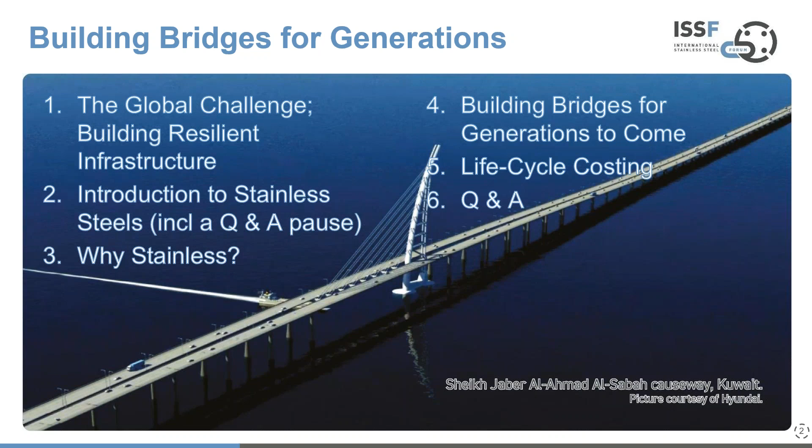Section 3 will talk about why you would choose stainless steels. Then in section 4, we'll showcase some of the current bridges where stainless steels have extensively been used and talk about why stainless steels were chosen. Section 5 will talk about life cycle costing, which is an important component when thinking about material choices, and particularly stainless steels. And then section 6 will have a fuller Q&A session. So the presentation section itself should take about 45 minutes, which gives us some time at the end for a full Q&A session.

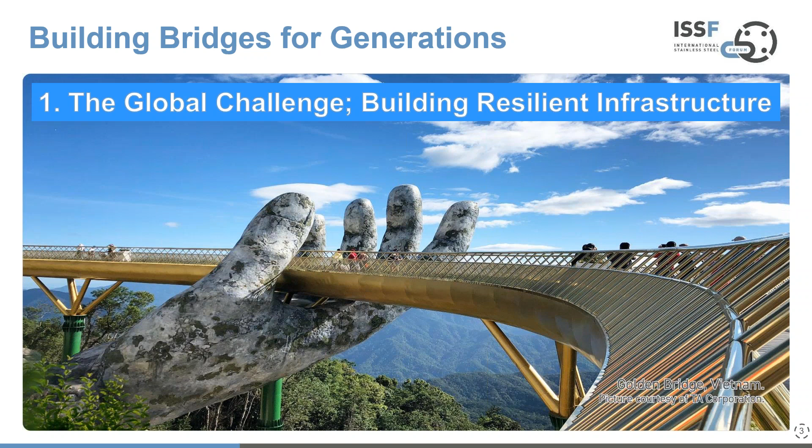So I'd like to move forward now, and we'll talk about the global challenge, which essentially is building resilient infrastructure. But first and foremost, I'd like to travel back in time to the birth of stainless steel. This gentleman, an English gentleman, Harry Brearley, was one of three people who are really credited for the creation or invention of stainless steels. And Harry Brearley is also credited with producing the first commercial cast of stainless steel.

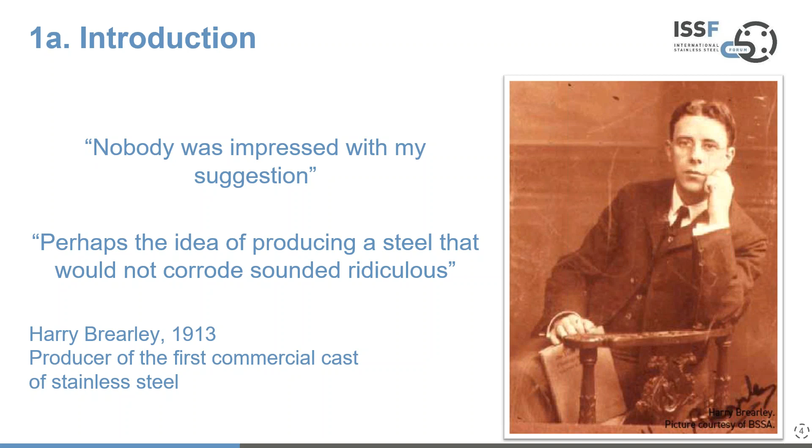And he made a wonderful quote in 1913: "Nobody was impressed with my suggestion. Perhaps the idea of producing a steel that would not corrode sounded ridiculous." And I think there is still some of Harry's words echoing around in today's society. People don't often consider stainless steels first and foremost, and there are many good reasons why people don't consider that. But I'll talk about some of those features a little later, so just hold Harry's thought in mind until we get into the section on stainless steels.

I'd also like us to consider the United Nations Sustainable Development Goal 9, which is about building resilient infrastructure, promoting inclusive and sustainable industrialisation, and fostering innovation. I think that's a very credible goal that, as a global society, we should all have no problem with. However, almost a year ago, Antonio Guterres, the United Nations Secretary General, made a statement that clearly said there is no escaping the fact that the global landscape for Sustainable Development Goal implementation has generally deteriorated since 2015. And that's a very sad reflection of what's happened all over the world.

So I think equally this frames what we are focusing on now, or we should be focusing on for our future to come, and particularly in light of things like the Paris Agreement and supporting the United Nations Sustainable Development Goals. So I'd now like to pose some questions about how I see our global challenge in this area. And I think it's probably fair to say, not everybody may agree with this, but we've allowed for some time

traditional thinking to dominate how we approach infrastructure. And frequently we focus on low-cost installations, contracts awarded to lowest price bidders. It's a very competitive environment. And we've all been brought up with that way of thinking, me included. But ultimately that will lead to suboptimal choices and definitely suboptimal outcomes. And one aspect of that is that maintenance and the associated costs is often overlooked up front. It's seen as somebody else's problem.

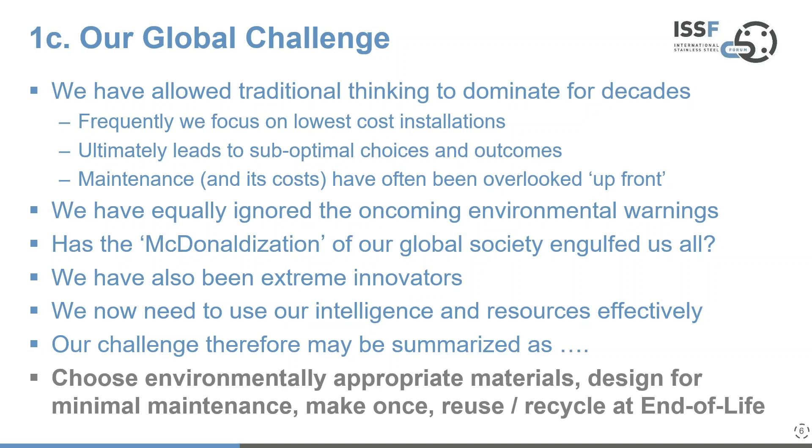So I think in the area of infrastructure, and particularly bridges, our challenge may be succinctly summarized as: we should choose environmentally appropriate materials, we should design for minimal maintenance, we should make once and once only, and that's once for generations. And then ultimately the end of life, and we should be looking beyond 100 years, we should reuse or at least recycle those materials. So that's the frame that sets the direction for the rest of this webinar.

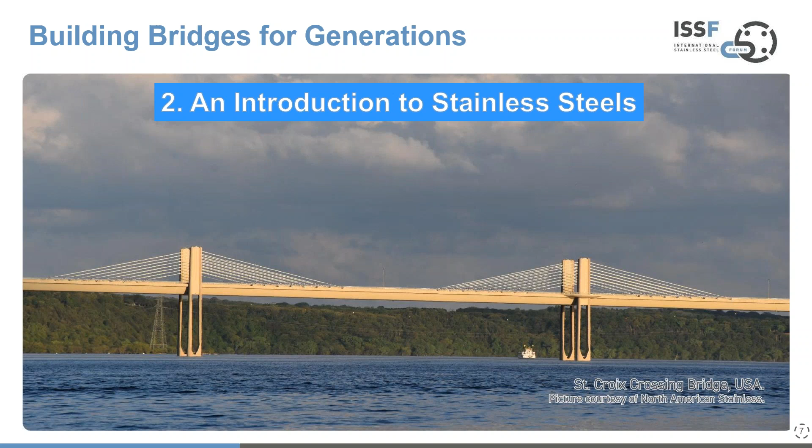And I'd now like to move on and give a fairly brief introduction to stainless steels. And it's important that people recognize the plural here. So let's start with some myth busting. Here are 6 statements about stainless steels that over my career I've had said to me many times. I think the top of the list is unsurprising for many people. They're a very expensive material. So many people have said to me, I can't even think about choosing stainless, it's so expensive.

Another common myth is that only 2 grades exist: 304, the 18-8 stainless, and 316, the molybdenum doped version of 304. People aren't aware of what else is out there. And again, I'll come back to that in a moment. Many people say, hey, these products are impossible to work with, they're difficult to form, difficult to machine, really hard to weld. Stainless steels are just too demanding. And then there's always a question about corrosion resistance. People just think they don't rust.

And that's great. We like people to think that, but choosing the wrong stainless steel for a particular environment will leave you with a rusting problem or a corrosion problem. So we have to have some knowledge here. Often people also believe that all stainless steels are non-magnetic. And that's not true. And again, I'll come back and describe that. And one of the most amusing ones that I've found, and this has been said more than once, is that stainless steels are only produced in the Northern Hemisphere. Other countries don't produce stainless steels, which of course is a fantastic myth when more than 50% of global stainless steels are produced in China today.

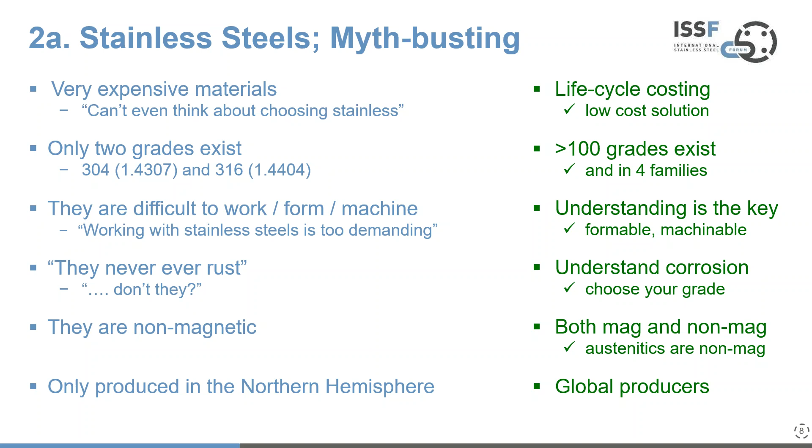So having sort of corrected a few myths, let's just talk about what are stainless steels. Well, fundamentally, stainless steels are alloys of iron and chromium with generally very low levels of carbon. And I've listed below a few of the other alloying additions. That's not an exhaustive list. That's just some of the popular and critical ones.

But I think it's very easy to say that stainless steels are really a set of related families of iron chromium alloys, all containing at least 10.5% chromium. And that's a critical content because it's that level of chromium as a minimum that makes stainless steels corrosion resistant. And I'd like to try and just demonstrate this with the help of a little diagram. So if you take this diagram that's now appeared on the bottom right-hand corner of your screen, we'll work through the diagram from the left to the right.

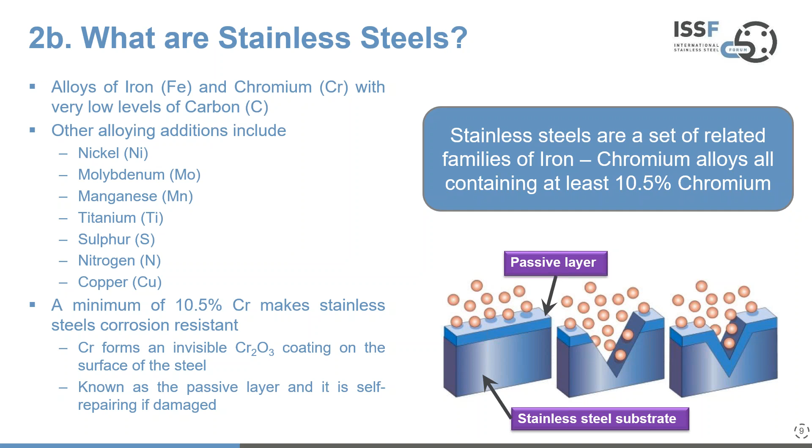What you have initially is the stainless steel itself as a substrate material with a layer on top. And that layer is what is known as the passive layer, and it's an invisible chromium oxide coating that forms freely on the surface of all stainless steels in the presence of oxygen. The oxygen atoms are denoted by the little spheres. Now, if you take a bit of an instrument to that surface of stainless steel, and in this case, it looks like somebody's taken an axe to it, and you damage that passive layer, all that happens within milliseconds is that passive layer heals. It's self-repairing.

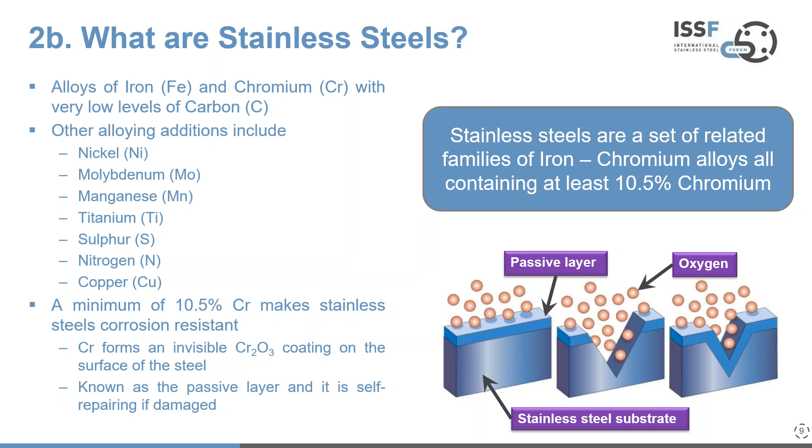So the oxygen present in the atmosphere combines with the chromium and just forms a new chromium oxide layer. And that's fundamentally why stainless steels are stainless. Now, you can do things to enhance that corrosion resistance, which I'll talk a little bit about, but that's the basic principle, and there aren't other materials that behave in this way. This is a very unique feature. So let's now look at the stainless steel families.

And I'll start with what are known as the martensitic group. And one of the grades in here is very similar to that Harry Brearley created back in 1913. But this group of stainless products are really described as having high strength, reasonable ductility, but not excellent. They are hardenable by heat treatment, and they have, we would say in our world, modest corrosion resistance. That's still somewhat better than carbon steel corrosion resistance, but in the world of stainless, it's at the lower end of our spectrum. And broadly, we've got 3 families there: precipitation hardening grades, carbon chromium grades, and then carbon chromium nickel grades.

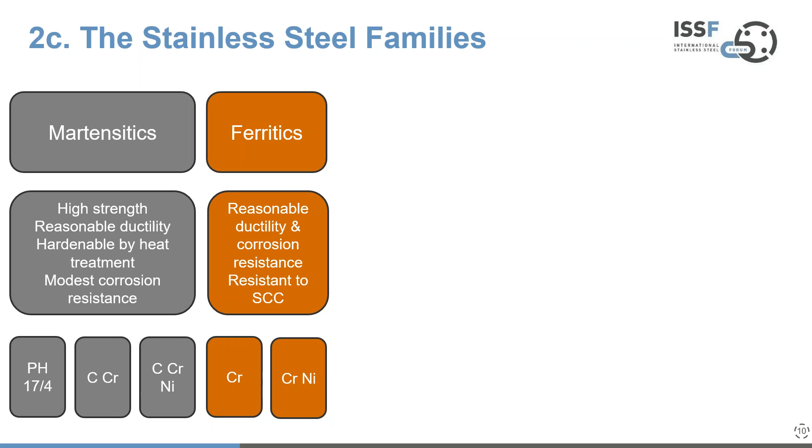Now, moving on from martensitics, we have the ferritic group of stainless steels. Here we have again reasonable ductility, but somewhat better corrosion resistance, and specifically a resistance to a corrosion phenomenon known as stress corrosion cracking. And these are either straight chromium steels or chromium nickel steels. And now, for reasons that will become apparent in a few moments, I'm going to move to the right-hand side of the family tree, so to speak, and talk about the austenitic group of stainless steels.

And people will be familiar with these in the forms of cutlery, pots, pans, domestic appliances. But these products have really good strength, they're highly formable, good to excellent corrosion resistance, and they have excellent ductility, even at very low temperatures. These products do not suffer from a ductile to brittle transition as temperatures fall. And there's a broad range of products here with chromium manganese nickel steels, straight chromium nickel steels, which people will have seen as the 18/8 or 18/10 stamped on cutlery or domestic goods.

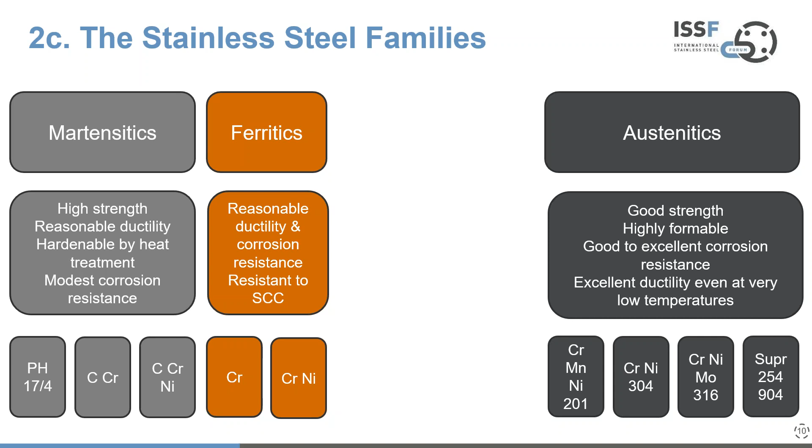Then we have the molybdenum enhanced grades like 316, which are often used in more aggressive corrosion environments. And then the highly alloyed family, or the super austenitic grades, which can be used in high temperature, very aggressive corrosion resistant needs environments. Now, sitting in the middle is the new kid on the block, so to speak, the duplex family of grades. And when I say new kid on the block, these grades have still been around for about 80 years, so they're not that new in the scheme of things.

But this is a combination of austenitic and ferritic structures in the same material. And what this brings together is the strengths of both of these types of stainless steel. So you have very high strength, good as a minimum to excellent corrosion resistance, good ductility, good fatigue strength.

And these are an area in terms of the stainless steel family that is probably least understood by many people. It's still a relatively modest proportion of total stainless sales around the world. And in this area, you have the lean duplex grades, which have reasonably good corrosion resistance, through to the super grades, which have fantastic corrosion resistance. And I'll demonstrate more about these particular grades shortly. But it is these grades that really have their place when it comes to bridge applications.

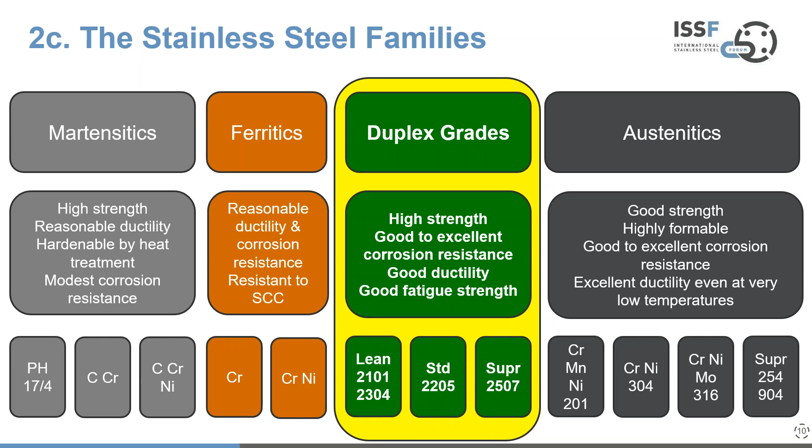So I'll just say a little bit more on these families of grades. The austenitic group, which is probably the biggest and most familiar sector, at an atomic level is based on a face-centered cubic structure where there are many atoms within the cubic array, as shown in the little diagram on the right, with an atom at the center or middle of each of the 6 faces of the cube, as well as at all the corners. And that gives this great ductility performance even at low temperatures. These grades are easy to form and weld, good to excellent corrosion resistance, and non-magnetic.

The ferritics, by contrast, have a body-centered cubic structure. So rather than atoms at the center of each face of the cube, there's just one in the center of each cube, as well as the atoms around the corners. And here you get reasonable ductility and reasonable corrosion resistance. So some sacrificing of the corrosion resistance, but again, these are still easy to form and weld, and this is a magnetic family of stainless grades.

The martensitic group are really a stretched cube. It's a body-centered tetragonal structure, so similar to the ferritic, but just, as I said, a stretched atomic structure. Here you get a high tensile strength and good fatigue strength, relatively modest corrosion resistance, as I've said. One additional benefit is wear resistance in this family of grades. And as the ferritics are, they are magnetic.

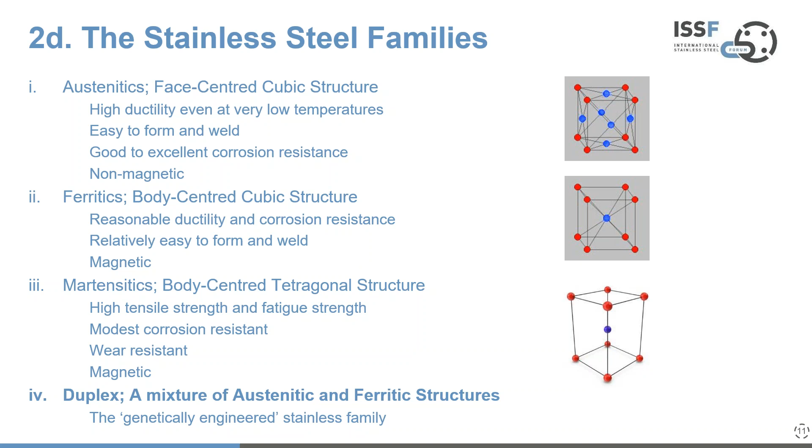So if we now just move forward, and I'm not going to go through this list in detail, the presentation will be sent out to everybody after the webinar, but I just wanted to highlight some of the key alloying elements involved and what they bring. Now, we've already talked about chromium, but the top three, chromium, nickel, and molybdenum, are the three that are going to be the most important in this webinar, because in terms of duplex steels, it's this combination of alloying elements that brings the duplex structures together and allows us to create a family of steels that has amazing properties.

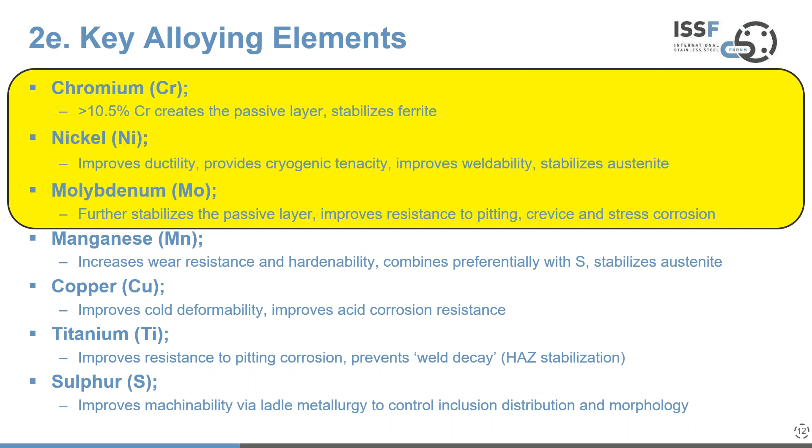So I'd like to say a little bit about duplex steels. Why are these a good choice? Why are they indeed the perfect choice for bridges? As I've said a moment ago, they have many desirable characteristics. First and foremost, the strength of these steels is generally 15 to 30% stronger than the design strength of a standard carbon steel. Their ductility is comparable with relevant carbon steel grades, and they retain their toughness down to -40 degrees centigrade. Toughness values equally are comparable with carbon steel grades.

These products are no more difficult than carbon steels to weld. Their fatigue resistance is at least as good as that of carbon steels, and in many cases better. And where this family of grades really wins is in terms of its resistance to corrosion, particularly pitting, crevice, as I mentioned a moment ago, stress corrosion cracking. So those are the real characteristics of duplex stainless steels that make them really interesting.

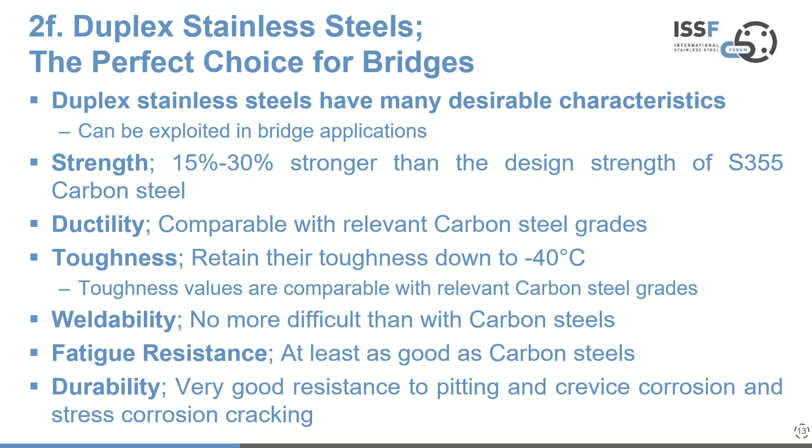Now, before I go into the why stainless section, I'd just like to pause for a moment to see if anybody would like to have a question or has logged a question via the chat facility. So, Joe, do we have anything so far? Yes, we have an interesting question here. It says, what is the maximum temperature a stainless steel can withstand?

And the question should be, what temperature would you like it to withstand, I think. Because there are so many stainless steels, it's a question of determining the operating environment, and we will identify the steel. Well, let's just take as an example duplex stainless steels, because we're talking about duplex for bridges. And the normal working range for duplex stainless steels without creating any problems is -50 centigrade up to 300 degrees, maybe 350 degrees centigrade. Above the 350 degree centigrade temperature, you can start to run into problems with embrittlement because of the formation of certain phases within the atomic structure of the steel. And I'm not going to bore people with the detail of that, but all stainless steels have a defined operating range. And there are some of the very highly alloyed family of stainless steels that can operate at much higher temperatures. So it's really a question of what are you looking for, and we can find the answer.

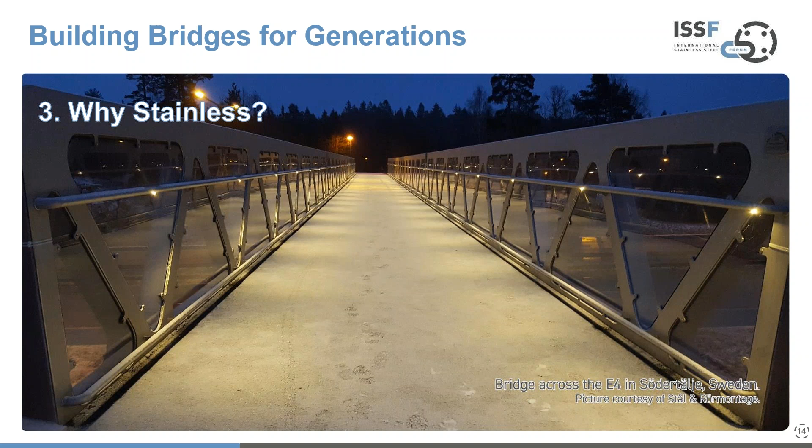Okay, thank you, Joe. So why would we choose stainless steels? Over the next couple of slides, I'm going to highlight some of the key features. First and foremost, you will get a long and essentially maintenance-free service life, more than 100 years. We can't say much more than 100 years yet, because the industry is not that old. It's only 107 years old. So we have no worries up to 100 years, and it's probably going to be much longer, but that's what we can quote with certainty at the moment.

Now, stainless steels, if specified correctly, are not susceptible to chloride corrosion, and that includes seawater, brackish water, and de-icing salts, as I've previously mentioned. In terms of properties for bridge applications, particularly duplex stainless steel, you've got this wonderful combination of strength, ductility, good elongation, good corrosion resistance, and good fatigue resistance. And again, it's all about choosing the right grade in the family for the right environment. The high strength grades reduce the weight of, say, concrete required, or even, and I'll show an example when we showcase a few, the need for concrete completely.

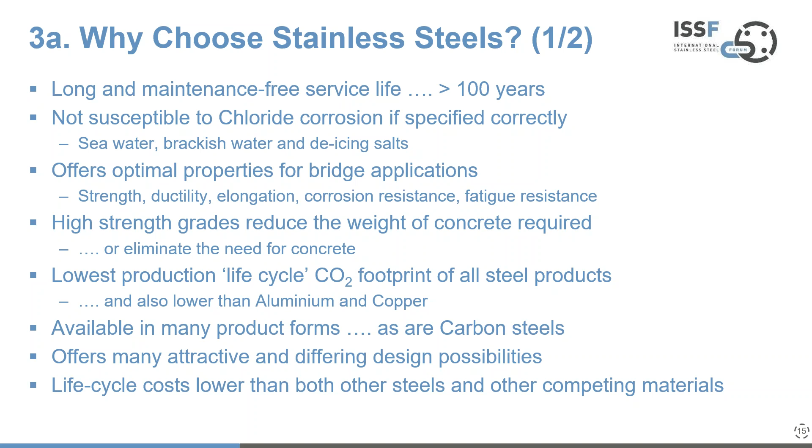Stainless steels offer the lowest life cycle carbon dioxide footprint of all steel products, and also lower than that for aluminium and copper. Stainless steels are available in the same product forms that carbon steels are, so it's really just having a different set of products on the same shelves. In terms of design possibilities, because you're dealing with a product that doesn't corrode and looks aesthetically pleasing all the time, you have many different design possibilities. You don't have to hide stainless away in concrete. And the life cycle costs are much lower than that for both other steels and other competing materials.

Now, in addition to those points, the usage opportunities give you some interesting design issues to consider. First and foremost, in saying what I'm going to say now, this is not about stainless steel trying to take over from carbon steels completely. That would be crazy. But in critical structures, replacing carbon steels with stainless becomes highly valuable, because then you prevent failures. And if you identify where things are going to corrode, replace them with stainless, you will certainly prevent failures. I've talked about the visual appeal, and a great case in point is the Chrysler Building in the USA, which has had stainless steel cladding for almost 100 years and has been washed twice with a normal household detergent.

That's all it takes, nothing more. Now, I know that's not a load-bearing structure, but this is just an indication that these products don't need much maintenance. Stainless steels offer a complete rethinking of traditional designs, and some of the bridges we showcase will show what's definitely possible. And there are many stainless steel grades available, as I've said, more than 100, and the duplex family alone is the optimal choice.

It's also fair to say that stainless steels globally are produced with about 65% as a minimum recycled content, and when you actually go to the larger producers, that recycled content is above 80%. These products are fully recyclable at the end of life, with no loss of material integrity.

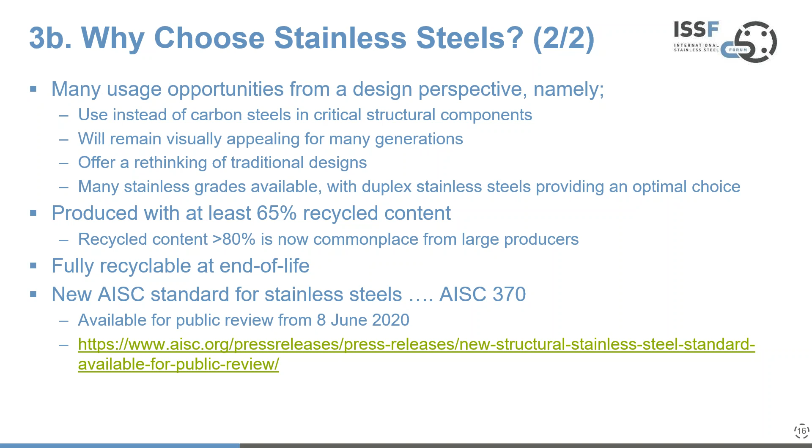And this year we now have out for public review the new AISC standard, AISC 370 for stainless steel in construction. And the link to this is within this presentation just below. And of course, everybody will be able to reference that once the presentation is circulated. So that's in a nutshell a lot of reasons why choosing stainless steels would be a good thing. Well, let's try and expand on that.

So in this chart, we are looking at the 0.2% proof strength of mainly stainless steels, but carbon steels included for completeness, against what is known as the pitting resistance equivalent number, which is a measure of corrosion resistance primarily caused by chlorides. And I've put a red line on there that is a chloride corrosion threshold or indication of where you get poorer corrosion to the left and excellent corrosion resistance to the right.

And what you see here in this chart is carbon steel has an excellent proof strength value, just shy of 500 megapascals, but that's very comparable with the duplex family of stainless steels to the right. And you can see as you move into the higher duplex stainless steels, the resistance to corrosion improves dramatically. So here, thinking about the duplex family, you've got the combination of really high strength and excellent corrosion resistance.

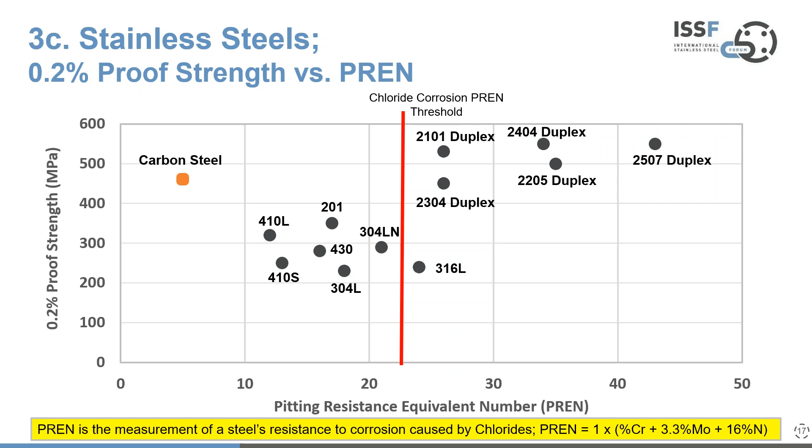Now, shown in the center of this chart are other stainless steels, and these have lower proof strength, but a fairly wide span of pitting resistance equivalent number, which means their corrosion resistance is somewhat variable. And you have in there a combination of martensitic grades to the left, ferritic and austenitics in the midsection, and then 316L more to the right. But these grades, when you're looking for high strength applications, are not the bunch of stainless steels you would normally look at first and foremost. It is the duplex family that are more interesting there.

Now, if I then move forward to consider elongation against the pitting resistance equivalent number, we get a slightly different picture here. So carbon steel and duplex steels are reasonably aligned in terms of elongation, duplex slightly better. But again, we know that the corrosion resistance of the duplex family is much improved. And then you get a separation of the mid-band of stainless grades. So the elongation of primarily the austenitic group is much better than the ferritic and martensitic group. And I think that's one of the features of austenitics. These are very ductile, very formable products, but you have to accept that there's always a trade-off here. You can't have perfectly all the properties all of the time.

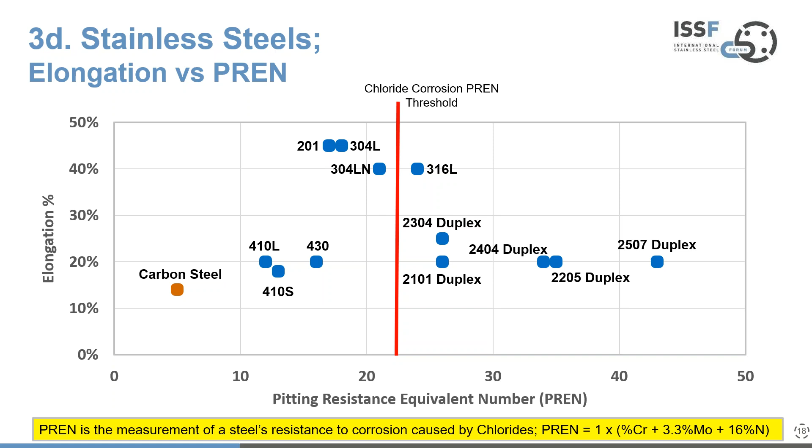So what I'll now try to do is bring those characteristics together in a simple diagram. So first and foremost, and this is the same layout as the previous charts, we've got the pitting resistance equivalent number along the bottom, yield strength on the left-hand side, elongation now on the right-hand side. And in the bottom right-hand corner, you would have what I would describe as fictional grades, a combination of excellent corrosion resistance with poor elongation and poor yield strength is not a greatly compatible mix of three things.

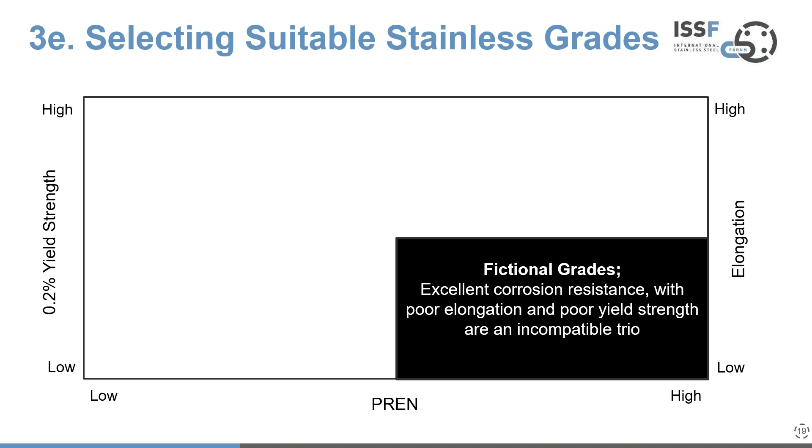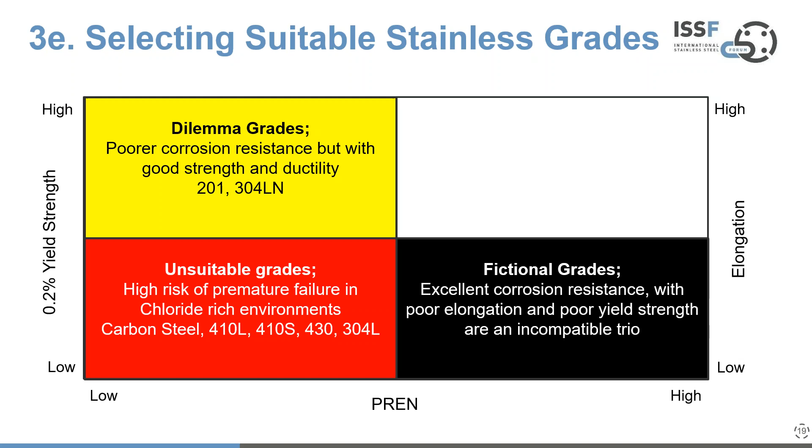But then in the bottom left, you have what I would term, when you're thinking about particularly bridge building, unsuitable grades. Here you have a much higher risk of premature failure, particularly in chloride-rich environments, and carbon steel sits in there, as well as some of the classic stainless steels. You then have, in the top left, the dilemma grades. Still, the corrosion resistance is not great, but you have good strength and good ductility. And here you see the manganese austenitic grades and the 18-8 doped with nitrogen to improve strength.

But then we get to the final box. What I would say is really the suitable family of grades. This is where you get the possibility of significant weight reduction due to higher strength, excellent corrosion resistance, including resistance to the classic 3 corrosion mechanisms. And you have broadly the duplex family and the higher alloyed austenitics in this box. So that's really the target box when you're thinking about structures that are load carrying and also in corrosive environments.

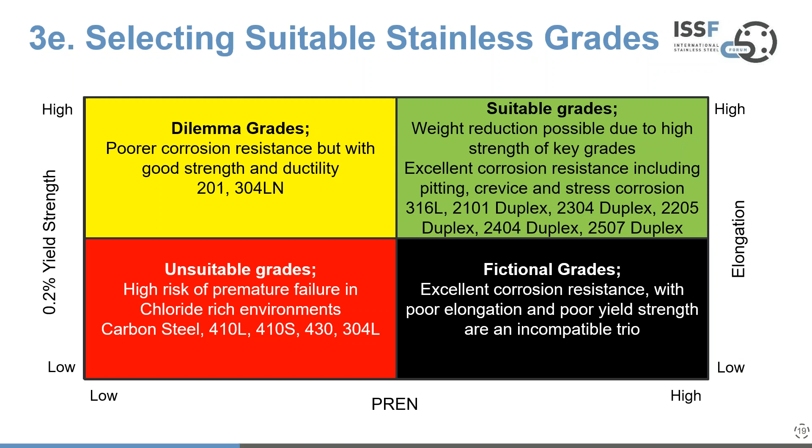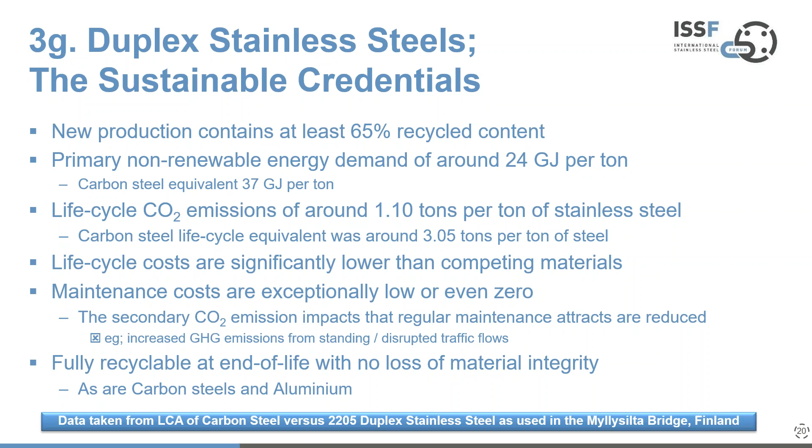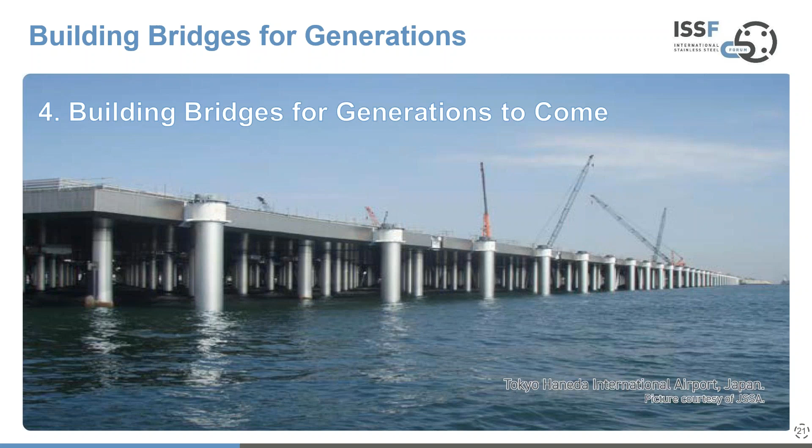So I'd now like to move into section 4 and showcase some of the bridges. And the particular example here is not a true bridge, but it's one of the runways at Tokyo's Haneda International Airport, which is a very impressive structure out at sea. But in terms of this section, what we'd like to do is showcase 6 bridges from around the world.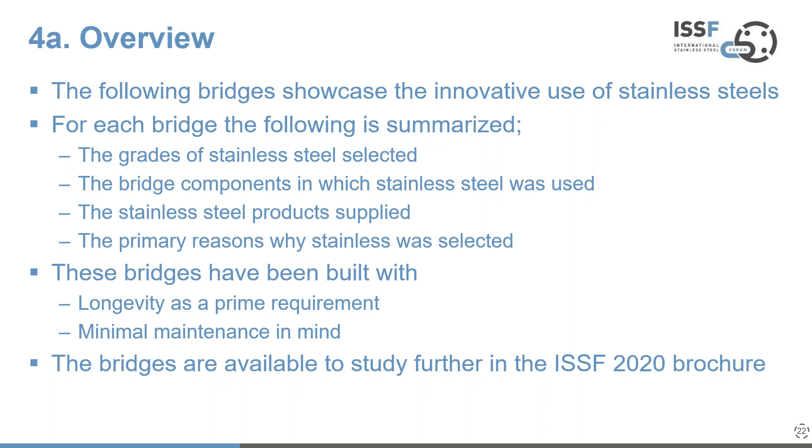And for each of the bridges, we'll explain the stainless steel grade or grades selected, the bridge components in which stainless steels were used, the stainless steel products that were supplied from the manufacturers, and the primary reasons why stainless was selected. Now, in all cases, both longevity and minimal maintenance were prime considerations. And within the ISSF brochure released this year on bridges, all these examples are available for further study, and that link will be provided again after the webinar.

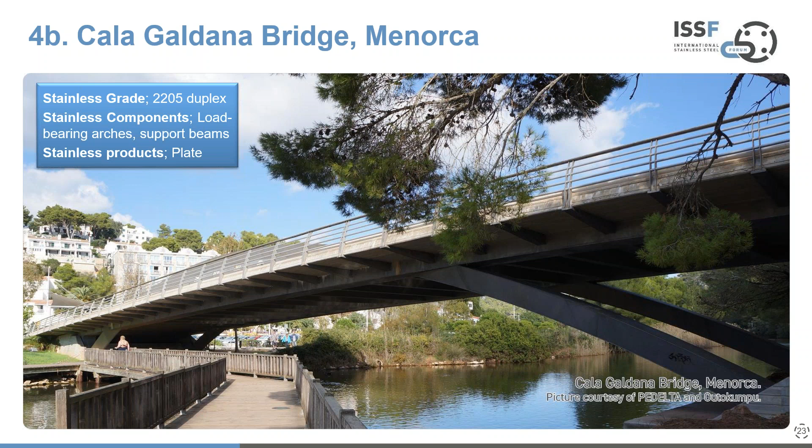So we'll start in the Spanish island of Menorca with the Cala Galdana bridge. And this bridge was built using 2205 duplex stainless steel, which is one of the standard duplex family of grades. The stainless components were the load-bearing arches and the support beams, and this was supplied as hot-rolled plate. And this is an example that demonstrates that when considering bridge building with stainless steels, we're not just looking at long products like reinforcing bar. Flat products have a big role to play as well.

Now, why in this case did the designers go for stainless steel? First and foremost, the high strength and good ductility, the good corrosion resistance in coastal applications, low maintenance needs, longevity, which I've touched on before, but also the really strong environmental footprint of these products.

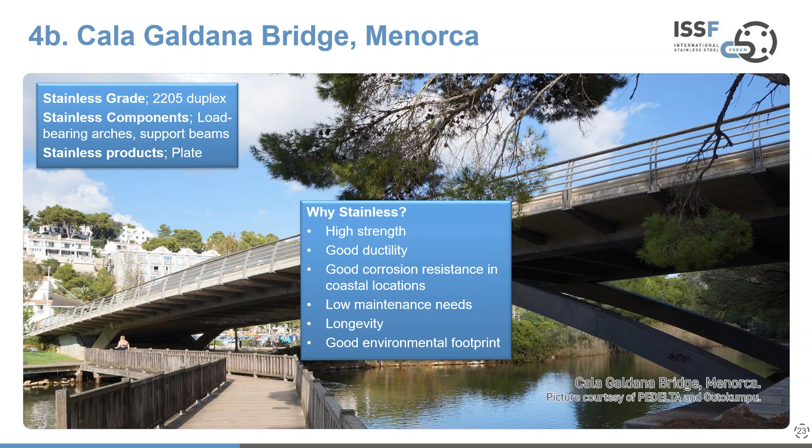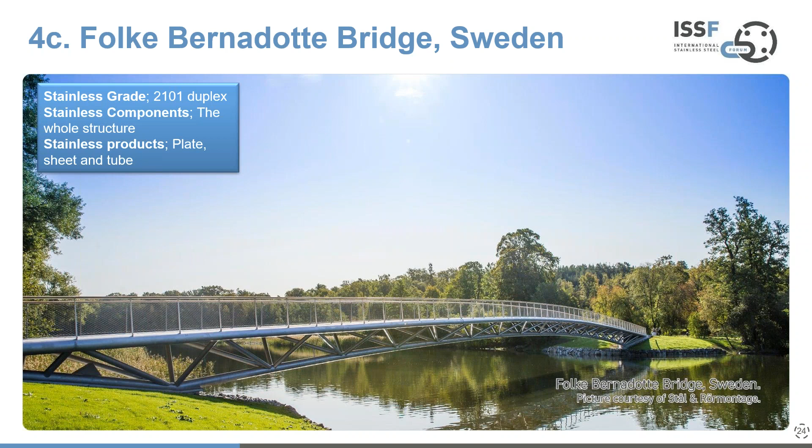I'd now like to switch to Sweden, to a very attractive bridge, the Folke Bernadotte bridge, which was made completely out of 2101 lean duplex. So the whole structure here is made from stainless steel. And this is a combination of hot rolled plate, cold rolled sheet, and tubular products. And the reason stainless steels were chosen here was the superior mechanical properties, again, of a duplex family of grades, the need for a maintenance-free life, and the low environmental footprint. And this is quite an attractive bridge, which provides a nice link over the water, and this shows one of the sort of design appeal features that stainless can bring to bridge construction.

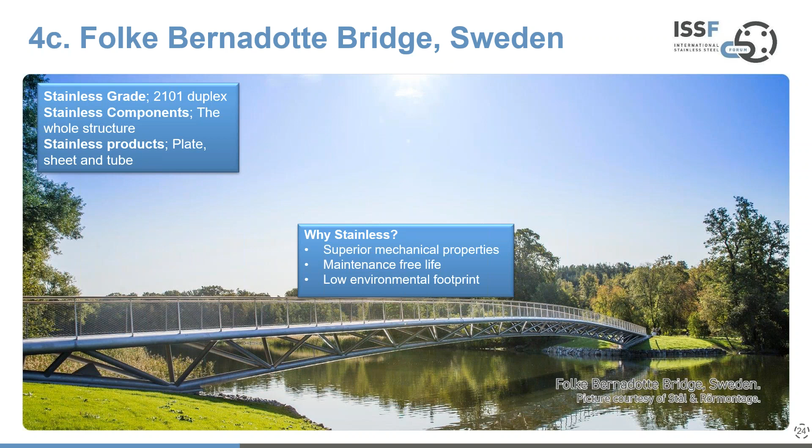Now here we have, moving into Japan, a very symbolic and impressive bridge, the Giboshi-bashi bridge, which you'll see from the photograph looks like a wooden construction, and it is. That's absolutely true. But below the waterline is the stainless steel structure that holds this thing together. And this is a Japanese grade similar to a 2205 duplex. And the stainless components, as I've said, are the whole structure below the waterline. And this is a combination of hot rolled plate and bars.

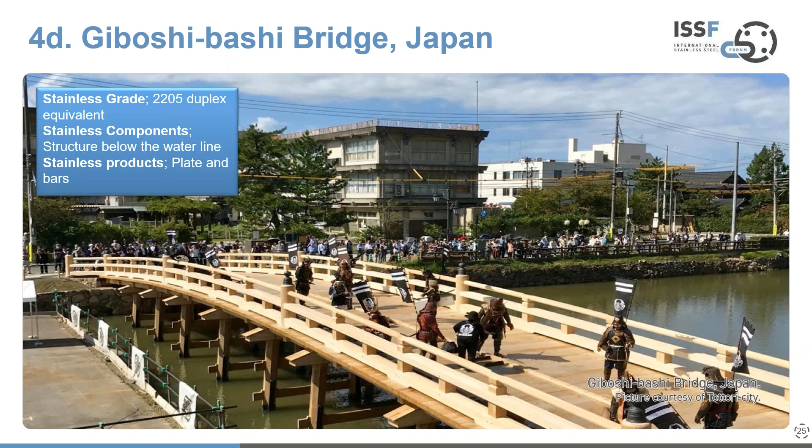But this was a way of ensuring that this beautiful bridge was preserved for many generations by having the critical components below the waterline made completely from stainless steels. And here, the key reasons were, again, mechanical properties, the durability, the corrosion resistance, the need for a maintenance-free life. It's an underwater application, and the excellent corrosion resistance within that application.

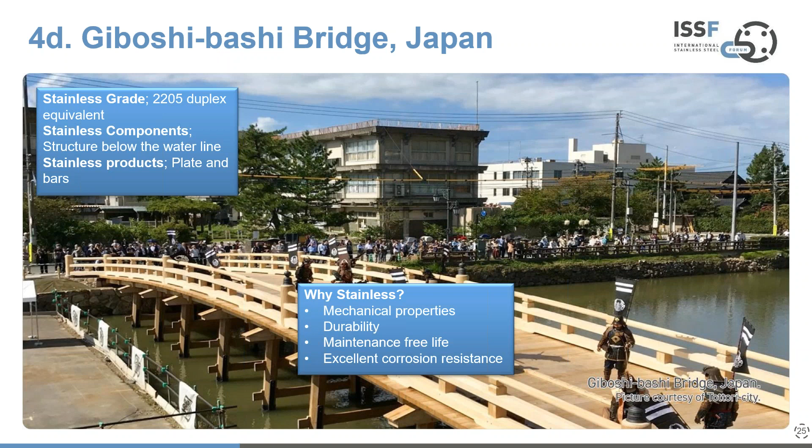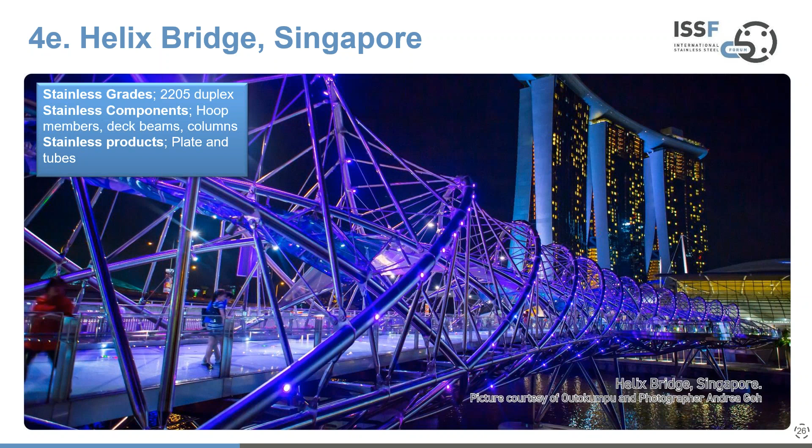Our next example is the stunningly beautiful Helix bridge in Singapore, which has a nod of the hat to the double helix of DNA. And this was built with 2205 duplex, and the components made from stainless steel with the hoop members, the deck beams and columns. And this is a combination of stainless plate and tubes. And this has a very interesting feature attached to it when we get to the why stainless section.

Some aspects that we've already touched on: the mechanical properties, the high fatigue strength, life cycle costing, maintenance-free life requirements, and excellent corrosion resistance. But the impressive thing here was that the weight reduction that stainless steel allowed made the material costs for this bridge equal to that of using carbon steel. So in this case, it was no more expensive. It was really an exploitation of the properties. And I think that's an important notion to carry forward.

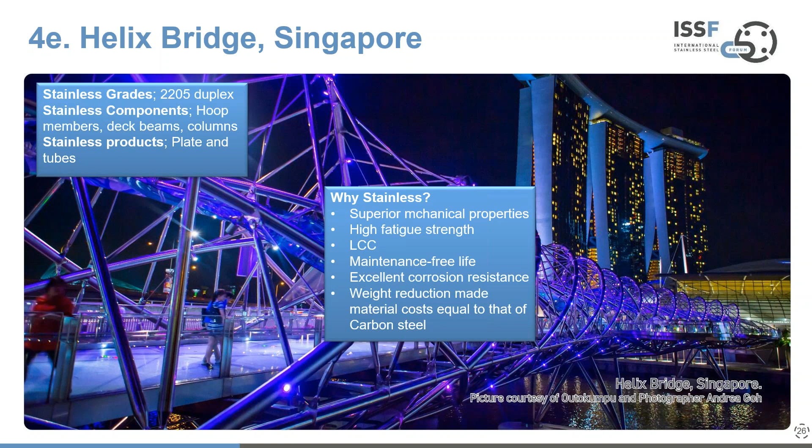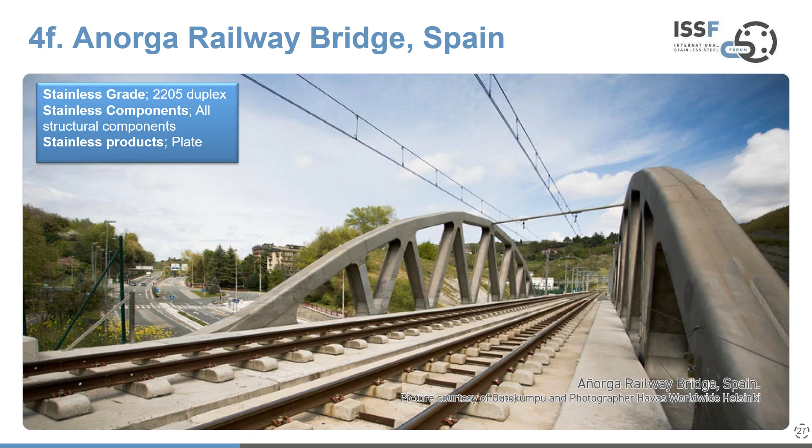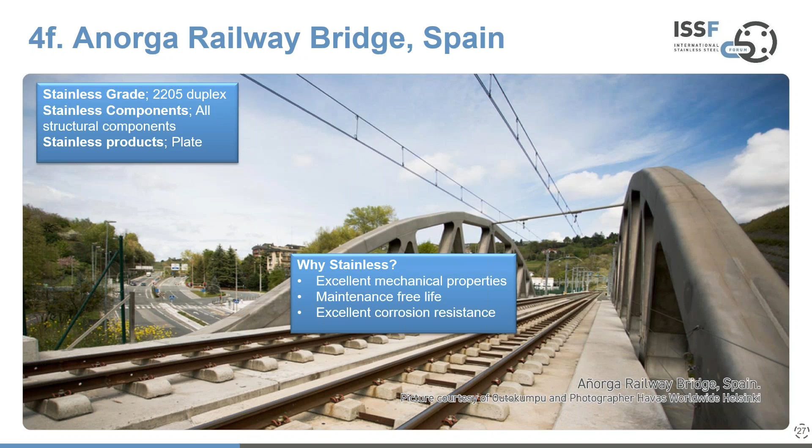And the reason stainless was chosen in this case was, again, the mechanical properties, the need for a maintenance-free life. This is an important railway connection. The operator didn't want downtime, and the excellent corrosion resistance. And this is an environment where you get pretty lousy weather for a lot of the time. I think it's 4 good days, 4 lousy days, 4 very lousy days, and then it repeats. So a good use of stainless steels to ensure ongoing continuity of a vital railway link.

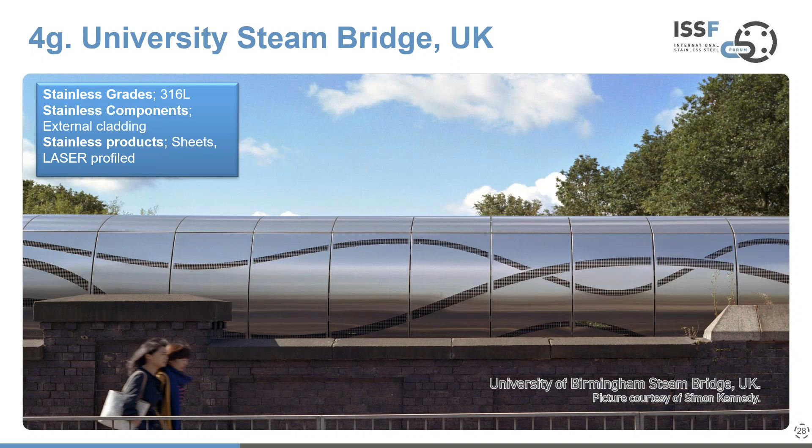And our last showcase bridge in this section is the University Steam Bridge at Birmingham in the UK. And this is a slightly different example where the stainless steel has been selected as a cladding product. And what you've got here is a use of 316L, which is an austenitic grade, and it's laser profile sheets used to clad the bridge. This location, which crosses a railway, a canal and a footpath, was a very difficult to access location.

So the reasons why stainless was chosen was, A, the aesthetics. It's very appealing and striking as an imagery feature. The superior corrosion resistance that a more highly alloyed austenitic grade brings, but also the need for a maintenance-free life. This location was considered very inaccessible, and so the designers wanted to be able to fit and walk away, which fits all the requirements of building sustainably.

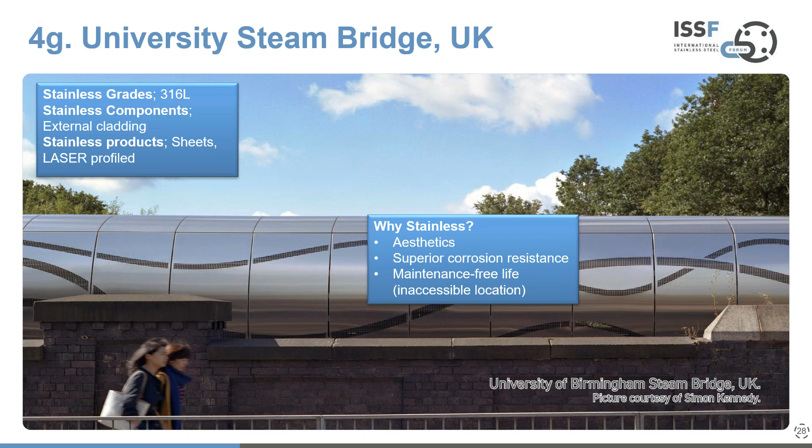So now I would like to move on to the fifth section, which is about life cycle costing. And here I hope to dispel some of the myths about the cost of stainless steel. Well, let's look first and foremost at the 4 aspects of life cycle costing. And they're succinctly put as the cost of acquiring the materials. So that's the cost of securing the materials and products for a specific project and their installation, and it includes delivery to the installation site.

Then you've got the costs of actually installing the materials on the site, then any ongoing maintenance costs to deliver an acceptable operation. And then there is an income stream that either comes from end-of-life recycling of those products or income from sales. And that can include, if it's a bridge, you charge people to cross the bridge, particularly if there is a significant commercial advantage for having the bridge in the first place.

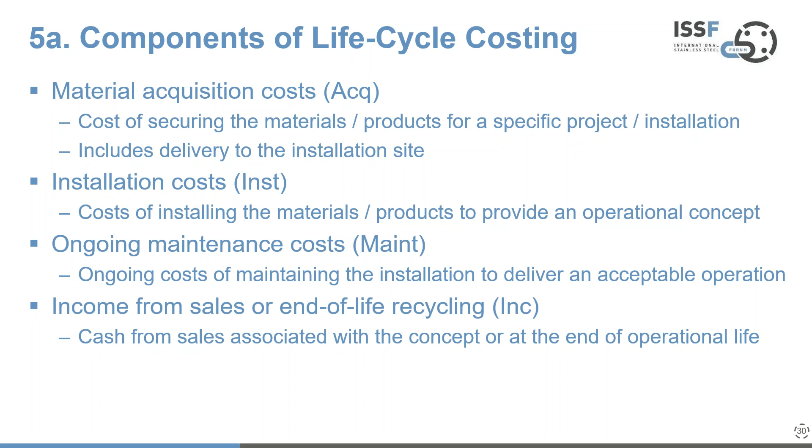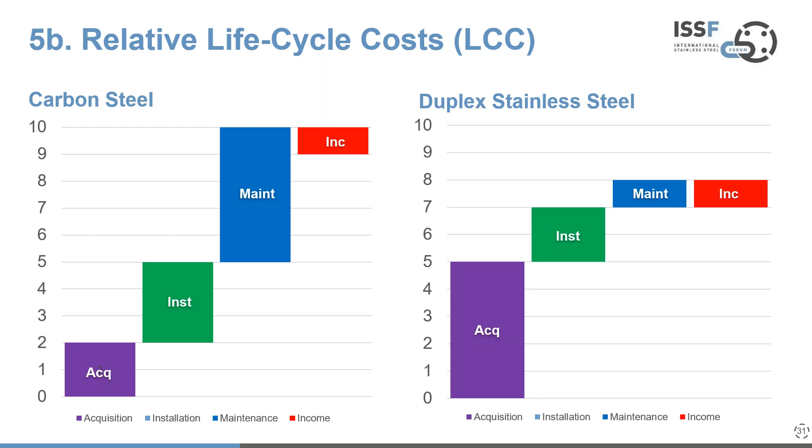So if we just consider that in terms of material differences, carbon steel acquisition costs will occur at least twice in 100 years of service life. In some cases, that will be more than twice, but we work with twice for prudency. For stainless steel, you do it once and once only. Installation costs will reflect the acquisition differences. So if you have to acquire more than once, you'll have more installation costs.

Maintenance costs for carbon steel will kick in. I've put notionally 5 years after installation. In some environments, that period will be shorter. And the interesting thing is that corroding carbon steel, particularly as rebar encased in concrete, ultimately causes spalling of the concrete. So you have a hidden dilemma. You don't initially see the corrosion effects taking place because you've hidden the product that is corroding.

And maybe the thought is that in hiding it, you're not exposing it. Unfortunately, concrete is somewhat porous and chloride ions will find their way to diffuse through the concrete. The maintenance costs of stainless steels will always be low. And as I've said earlier, simple cleaning is often all that is needed.

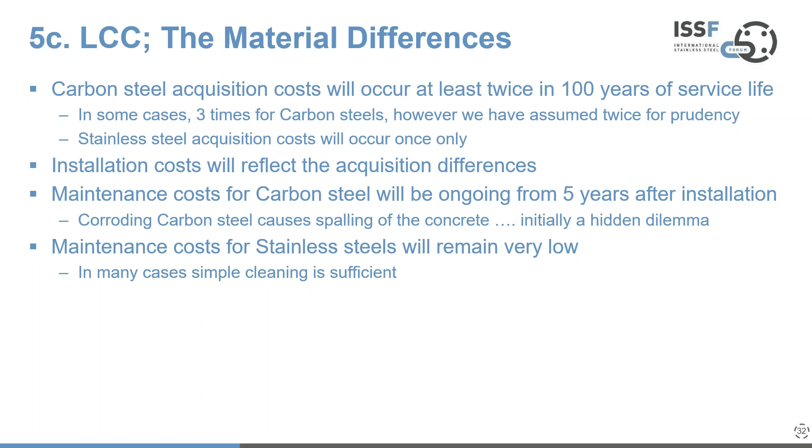Now, we have a real life case study, and this is based on the Progreso Pier and Causeway in Mexico. If we look at the left-hand side, you can see in the photograph at the bottom, a large causeway on the right-hand side of the photograph and a smaller pier on the left-hand side. The causeway was built in 1941 using 316L austenitic stainless steel rebar. And in 1969, the additional pier was built using carbon steel rebar.

And then if we roll forward 40 years and look at essentially the same photograph, the older large pier and causeway is still perfectly intact, and the smaller pier has pretty much disappeared. So this is a perfect example, and I know it's a marine environment, that in this sort of environment, you don't get a very long life when you're choosing a product that is going to corrode.

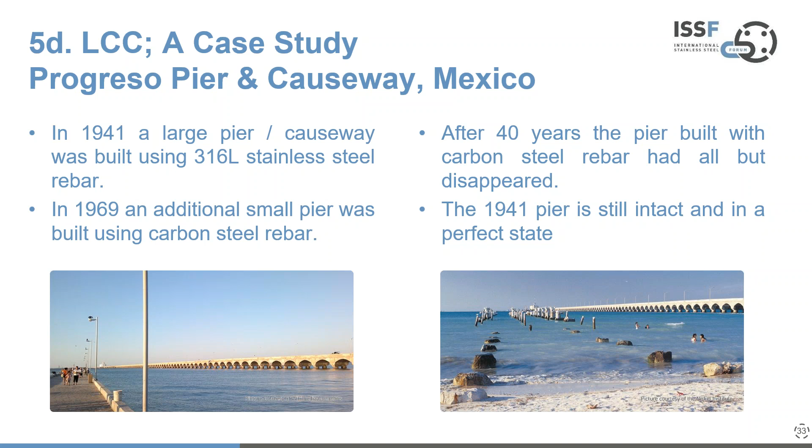If we equally look forward at the comparative life cycle costs here, we'll see some interesting differences. Again, maintenance differences are huge. You put carbon steel into these environments, you're going to have a huge and ongoing maintenance bill. And this was based on 40 years. With the choice of stainless steel, you get very low maintenance completely. Yes, acquisition costs are slightly higher, but it's really in maintenance that you win and lose when considering things in this manner.

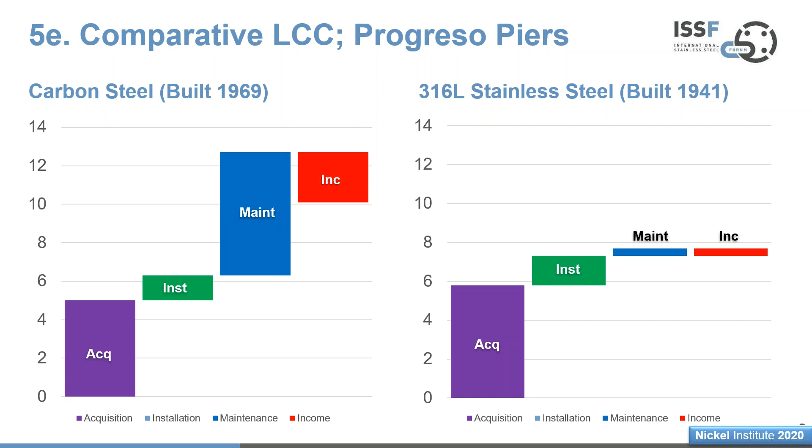So I'd now like to wrap up, before we go to questions, with a handful of conclusions. There is no doubt that stainless steels are a superb material choice, particularly the duplex family of grades. That's not to say that carbon steels and other materials don't have a key role, they absolutely do. But the failure of many bridges using carbon steels, and particularly the components within those bridges, can be completely predicted. So it's about knowing the elements within each structure where corrosion is highly likely and dealing with that.

We know that the corrosion resistance of stainless steels is generally excellent, but it's about choosing the right grades for the right environments. One of the appendices attached to this presentation, and I'm not going to go through the appendices because it's much more detailed technical stuff, will explain what grades are appropriate for different operating environments.

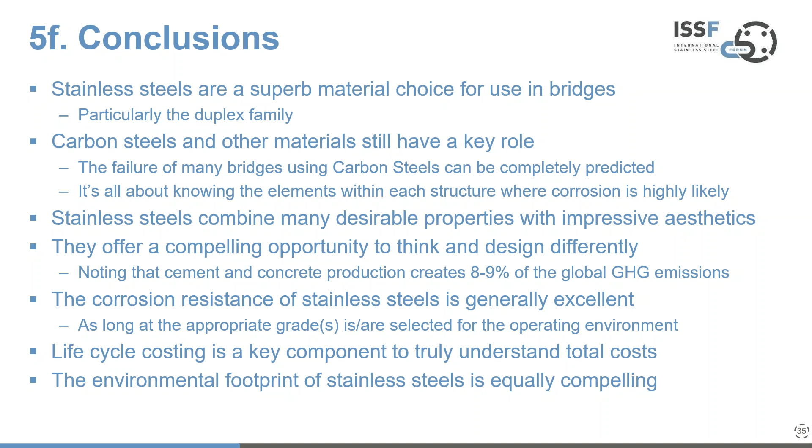It's important to note that life cycle costing is a key component. We need to transform our thinking from low cost installations to life cycle thinking. Let's use our resources wisely, let's make once. And the environmental footprint of stainless steels is equally compelling and should never be overlooked. So that summarizes the elements of this afternoon's presentation.

And I'd now like to open the floor to questions. Joe, do we have any that have been logged already?

Yes, we do. The first question is, do stainless steel reinforced structures have a better earthquake resistance than carbon steel ones? I think, again, if you're looking at the duplex family, and it's an interesting question because there have been lots of developments in recent years about the seismic resistance of stainless steel components. So the simple answer is yes, they do.

Again, it's about choosing the right grade for the right environment. But the Japanese producers of stainless steel and the key users there have done an immense amount of work recently on the use of stainless steels for many applications that will withstand extreme seismic activity. And I think that the Japanese Stainless Steel Association probably have some excellent case studies to illustrate that. So I would say that Japan, probably closely followed by Korea, are two of the areas who've done a huge amount of work in this area. But the simple answer is yes, you get a huge benefit.

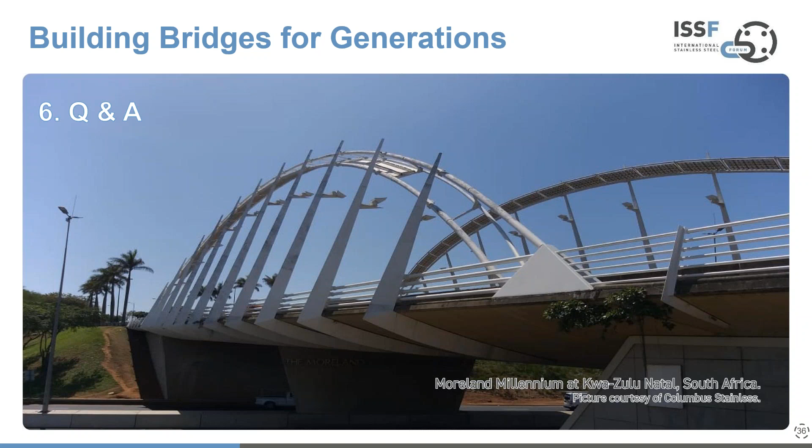And as I sign off, I'd just like to leave everybody with a couple of thoughts from two of my favourite people around the world. Sadly, both of them no longer alive. But the great William Edwards Deming said, we don't have to necessarily think about change because survival is not mandatory. But I think we do have a responsibility to our children and our children's children to ensure that everything does survive. And also the great Peter Drucker, who I met once, he said, the greatest danger in times of turbulence is not the turbulence, it's to act with yesterday's logic.

And I think we sit at a crossroads where we have the opportunity to now use today's logic, and let's abandon yesterday's logic. So thank you everybody for listening. I hope it was in some way informative, stimulating and thought-provoking.